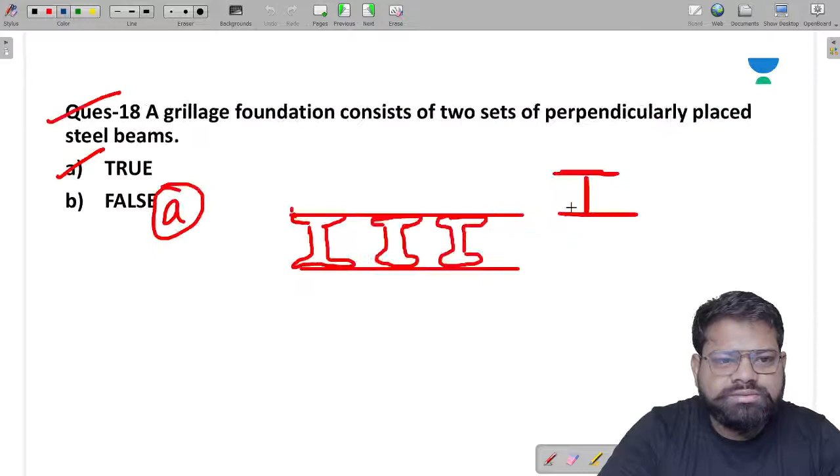So in the last class what did we do, we did many one liners up to question number 25, I think. Up to question number 25 we have done the one liners. So let's start the one liners from question number 26.

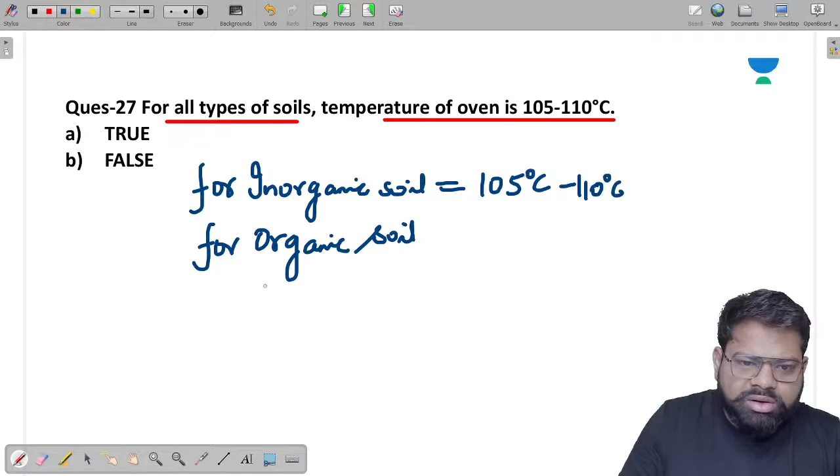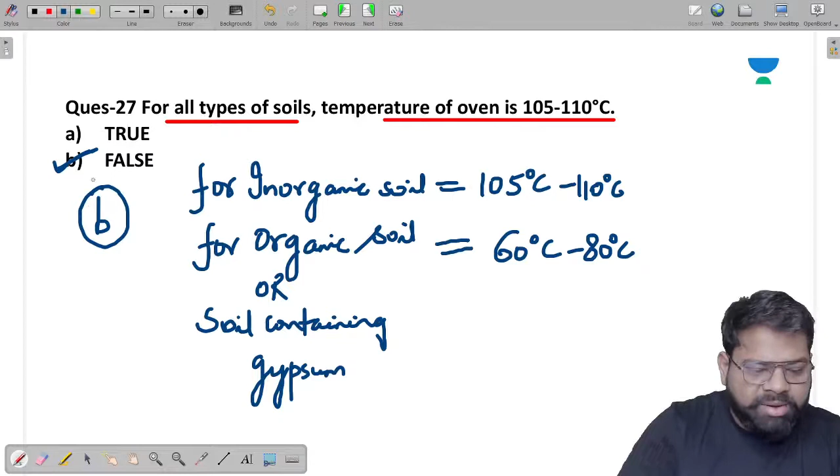But if I talk about the organic soils, or soil containing gypsum content, then the temperature lies between 60 degrees Celsius to 80 degrees. What he is trying to say, for all types of soil, the temperature lies between 105 to 110 degrees Celsius - this statement is absolutely false. The correct answer of this question would also be B. Moving forward, question number 28.

Question number 28. Just read it. As the coarser particles are mixed in the soil, the value of OMC increases, but the maximum dry density decreases.

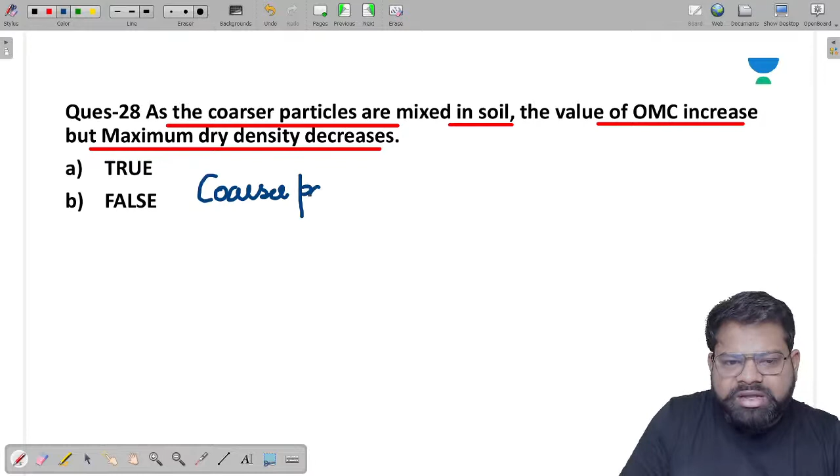When we add some coarser particles in any soil, the specific surface area of that soil will decrease. If the specific surface area decreases, then the soil needs less water to lubricate its particles. And if less water is required, then a higher gamma D will be obtained. So when you add coarser particles to the soil, the specific surface area decreases, OMC will automatically decrease, and if OMC decreases, then the maximum dry density gamma D maximum will increase.

The correct answer would be: he is saying that the OMC will increase but the maximum dry density will decrease. But actually, when we add coarser particles to the soil, the OMC decreases and the maximum dry density increases. So this statement, question number 28, is also false. This statement is absolutely false.

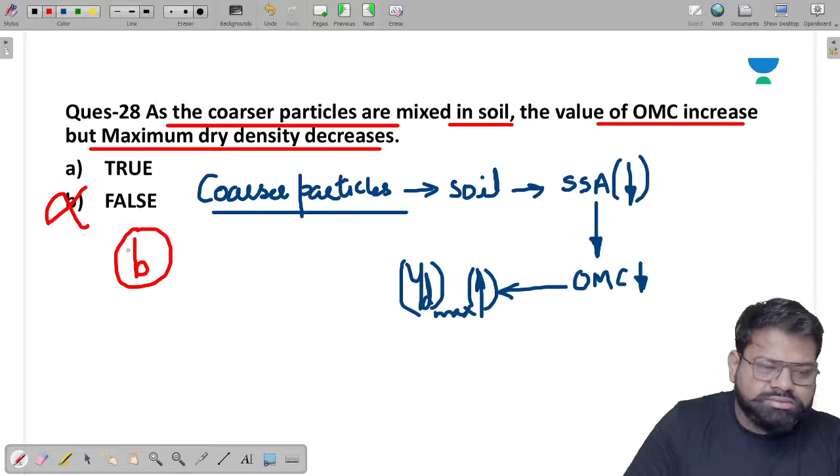Moving forward, this is question number 29. Tell me the answer of question number 29. Silty gravel has a higher maximum dry density as compared to silty sand at the same compaction energy.

This is a beautiful question. Silty gravel has a higher maximum dry density as compared to silty sand. So there are two types of soil: one is silty gravel, which is GM, and another is silty sand, which is SM.

If you apply the same compaction energy to both the soils, my dear students, then which soil has a higher specific surface area? The specific surface area of SM is greater than the specific surface area of GM.

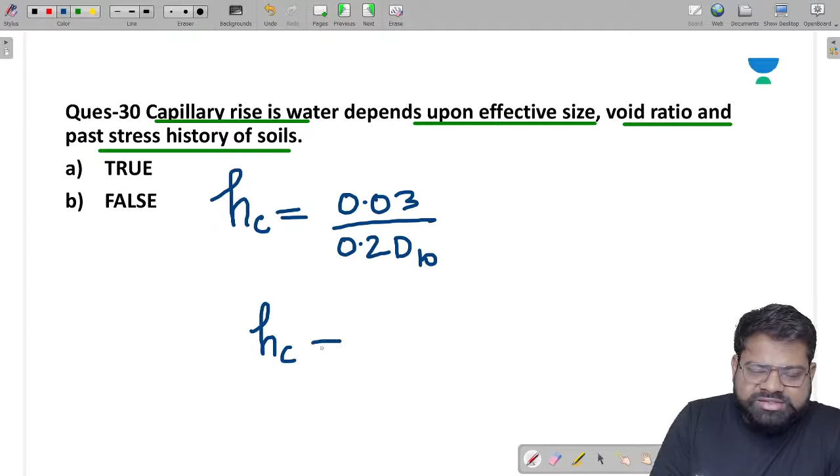As we know, capillary rise is a complex function of the soil voids which are interconnected in the soil. HC can be determined by 0.2, or 0.03 divided by 0.2 times D10, or it can also be determined by HC equal to C upon E into D10.

So here you are saying that capillary rise depends upon the void ratio, capillary rise depends upon the effective size, and also capillary rise depends upon the past history. So this statement is absolutely true. The right answer of question number 30 would be A. Very good, the right answer of question number 30 would be A.

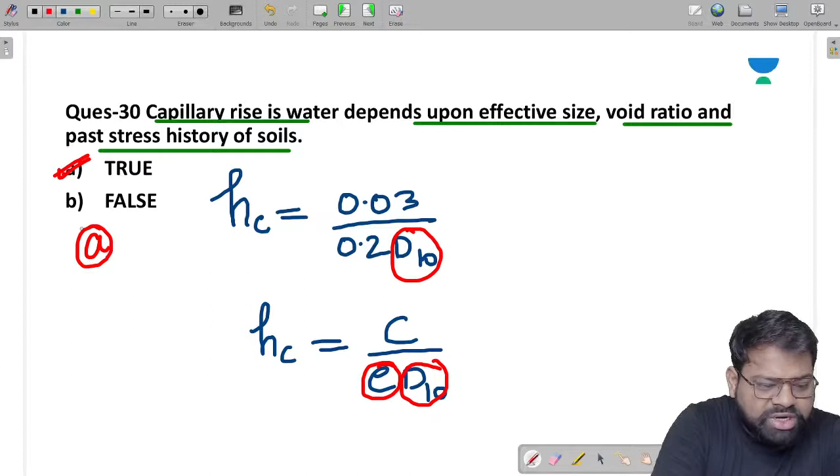Moving forward, tell me the answer of question number 31. Tell me the answer of question number 31.

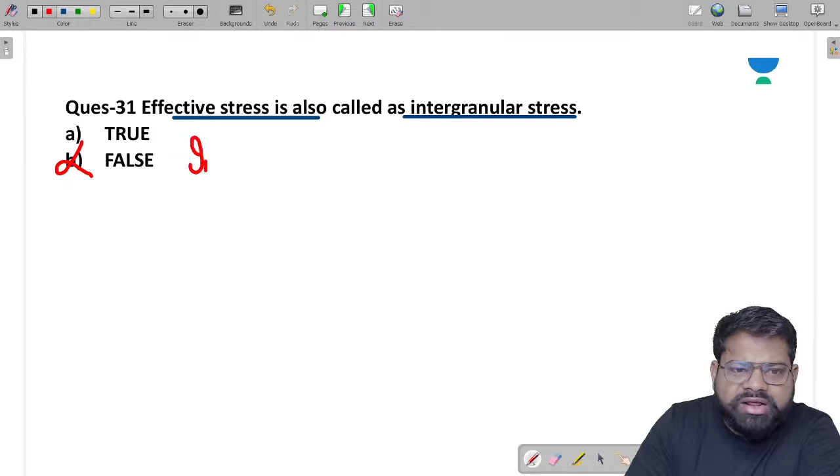If I talk about the intergranular stress, what is intergranular stress? It is the sum of forces transferred through grain to grain contact in the normal direction, divided by grain contact area. This is called intergranular stress.

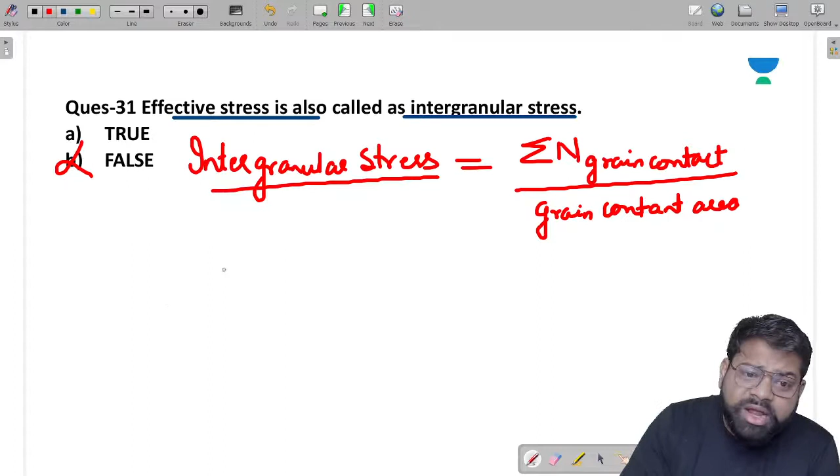But according to Terzaghi, effective stress was defined as the summation of normal forces transferred through grain contact, divided by total area.

So if you see the first statement, it has a certain physical meaning: intergranular stress equals the summation of forces transferred through grain contact, divided by grain contact area.

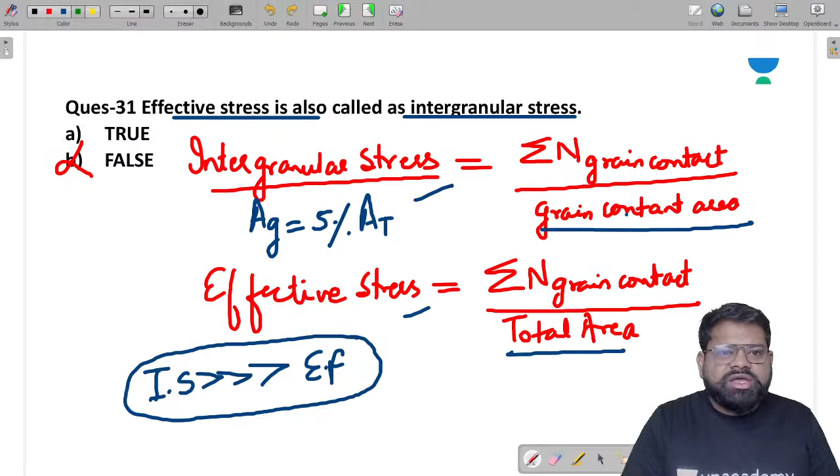Shashi is absolutely right. This statement was true according to Whiteman, but when Terzaghi came into the field for effective stress, he defined it in a better way. That's why this assumption of transferring stresses through grain to grain contact, called effective stress, was discarded. Nice explanation by Shashi, very good.

Moving forward to question number 32: best soil for homogeneous rolled embankment. What do you mean by homogeneous? It means the soil is homogeneous throughout its cross section and length. What do you mean by rolled? It means the dam is constructed by rolling, by doing compaction. By rolling or compacting a homogeneous soil, we construct what is called a homogeneous rolled earthen dam.

So he is asking what is the best soil for the homogeneous rolled dam or embankment. Just think, what is the purpose of a dam?

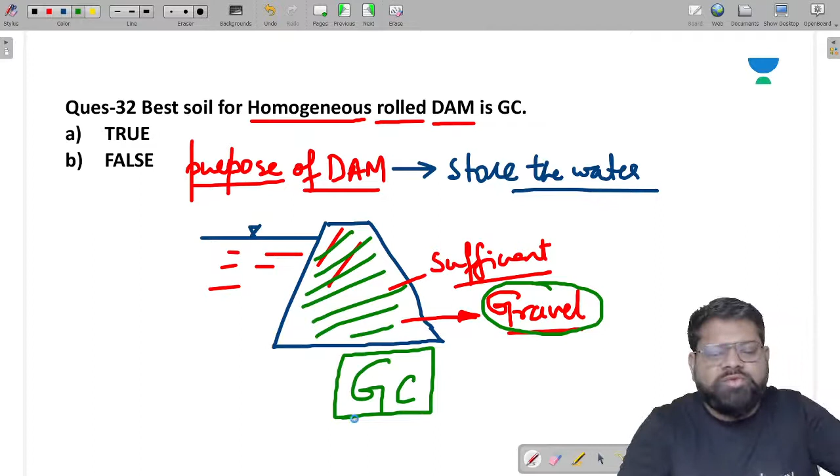Moving forward to question number 33. Tell me the answer of question number 33.

What is it all about? When the actual hydraulic gradient is equal to critical hydraulic gradient, then the effective stress becomes zero. When the actual hydraulic gradient becomes equal to critical hydraulic gradient, then the effective stress in clay becomes equal to zero. Whether this statement is true or false, Madhu Maurya is saying 33's answer is B.

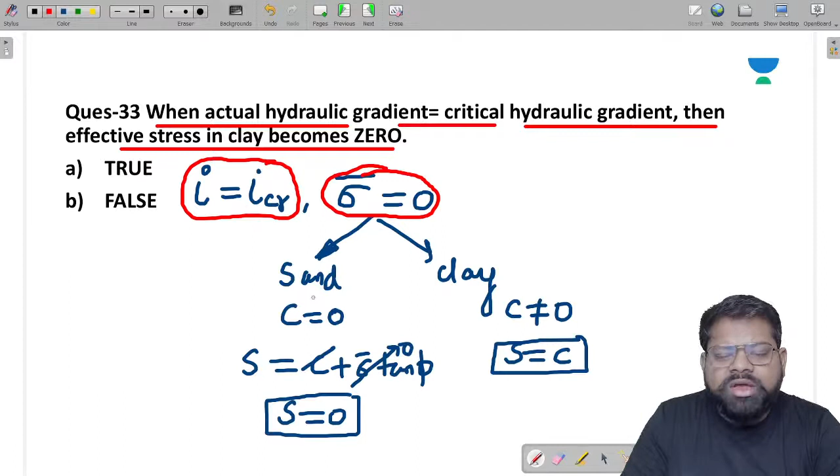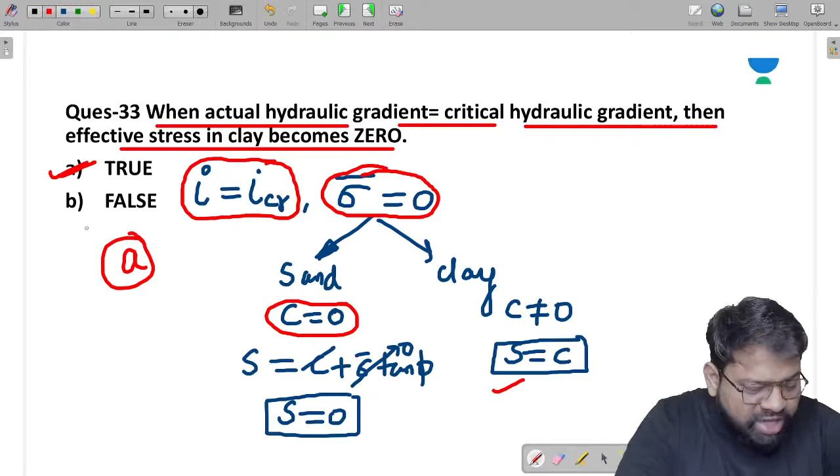This statement is absolutely true. Both the soils will be subjected to zero effective stress. I hope your concept is cleared now. Moving forward, yes Shashi, your answer is right, but Madhu Maurya, your answer is wrong. No issues, moving forward to question number 34.

Tell me the answer of question number 34.

So what he is trying to say is that the flow net is the graphical solution of the Laplace equation, which indicates how much hydraulic energy will be lost when the water flows through a resisting medium. When water flows through the resisting medium, how much energy will be lost? He is trying to ask. So the right answer of this question would be 34's answer A.

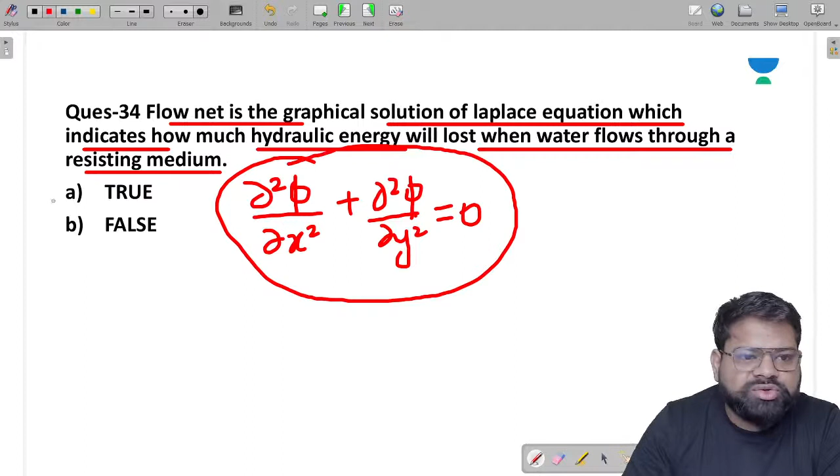Moving forward to the question number 35. Tell me the answer of question number 35.

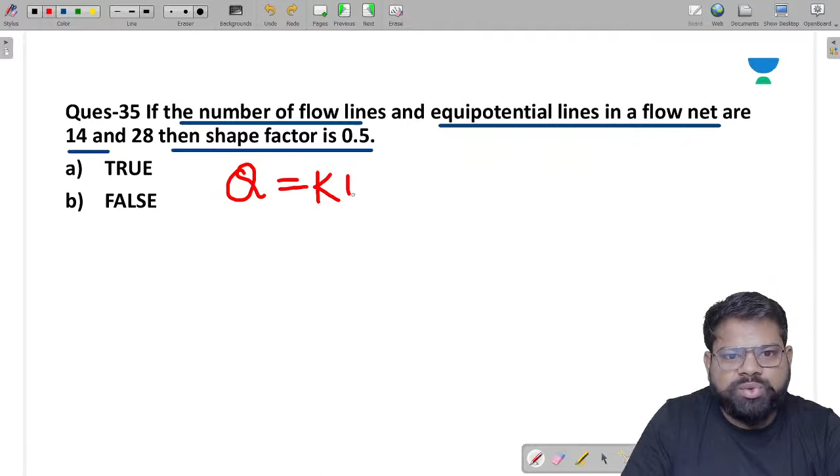So Madhu is 35 का B. देखते हैं जरा बेटा, शेप फैक्टर क्या होता है. अगर आप बेटा फ्लो नेट की मदद से डिस्चार्ज निकालते हैं तो Q होता है, Q is equal to KH multiplied by NF upon ND. So this NF upon ND is called as shape factor.

So कह रहा है if the number of flow lines and number NF होता है number of flow channels, ND होता है number of equipotential drop. और नंबर ऑफ फ्लो चैनल्स किसके बराबर होते हैं, नंबर ऑफ फ्लो लाइंस -1, एंड नंबर ऑफ इक्विपोटेंशियल ड्रॉप इज इक्वल टू नंबर ऑफ इक्विपोटेंशियल लाइन -1। सो बेटा यहां से अगर आप शेप फैक्टर निकालेंगे SF, तो नंबर ऑफ फ्लो लाइंस आपको दे रखी हैं 14, तो 14 - 1 नंबर ऑफ फ्लो चैनल्स डिवाइडेड बाई आपको बेटा इक्विपोटेंशियल लाइन दे रखी है 28।

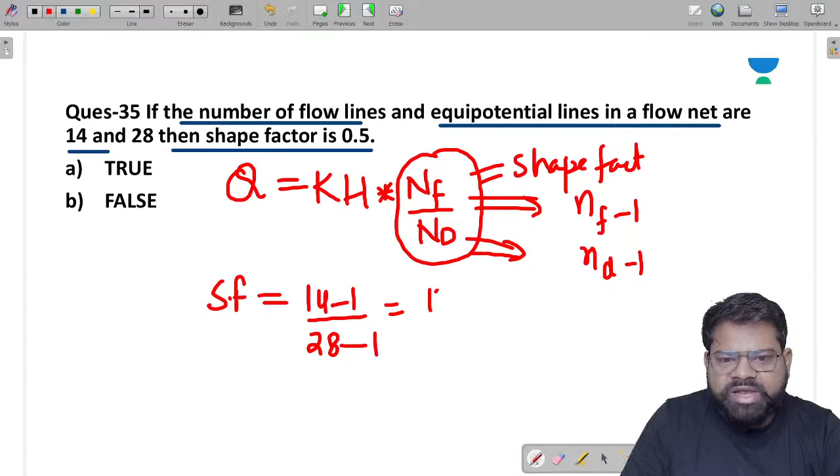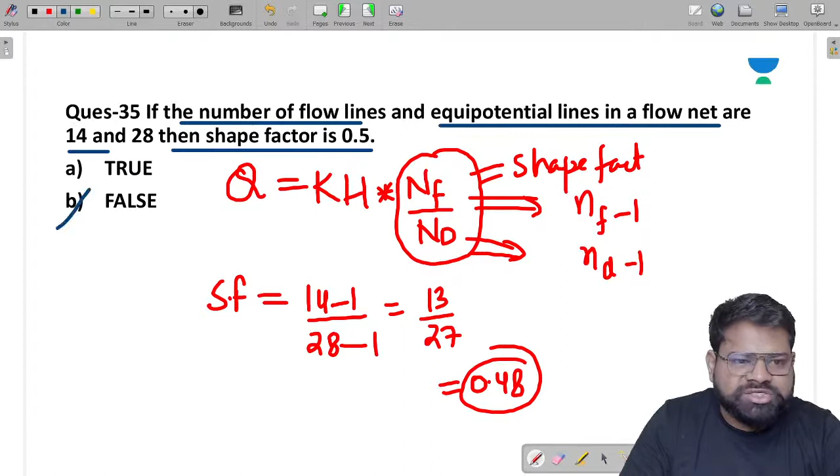तो ये हो जाएगा 28 माइनस 1, तो ये वैल्यू आ जाएगी 13 डिवाइडेड बाई 27। कितनी वैल्यू आ रही है, ये वैल्यू आ रही है 0.48, लेकिन साहब बोल रहे हैं 0.5, तो इसका मतलब ये ऑप्शन फॉल्स हो जाएगा। Very good explanation, very good answer by Shashi and Madhu. Okay, great.

Moving forward to the question number 36. Question number 36 का आंसर बताइए। Tell me the answer of question number 36.

When the water flows from a higher permeability region to the lower permeability region through a non-homogeneous section, then the flow lines deflect away from the normal drawn on a non-homogeneous section.

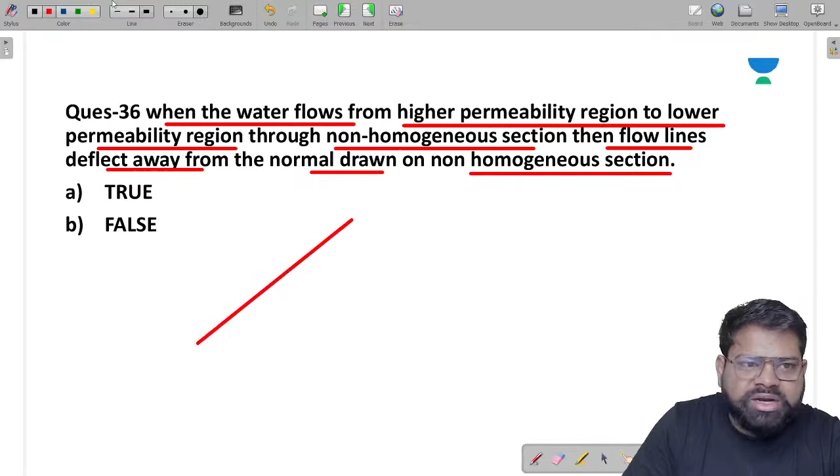When the water flows from high permeability region, suppose this is the region, the high permeability region. What does it mean by high permeability region? It means suppose the permeability here is K1, K2, so here K1 is greater than K2. If K1 is greater than K2, then the water will flow easily, then the head loss will be less. When the head loss is less, it means this medium is the rarer medium. In this case, this medium will be denser as compared to this medium.

Now what happens when water flows from higher permeability to lower permeability? This is basically the flow line, and this is basically the normal drawn. So what happens when light flows from rarer medium to denser medium, it will bend towards the normal. Similarly, when the flow line or water flows from rarer medium to denser medium, it will bend towards the normal.

And what he is saying is that it will deflect away from the normal, so this statement is false. The correct answer would be B.

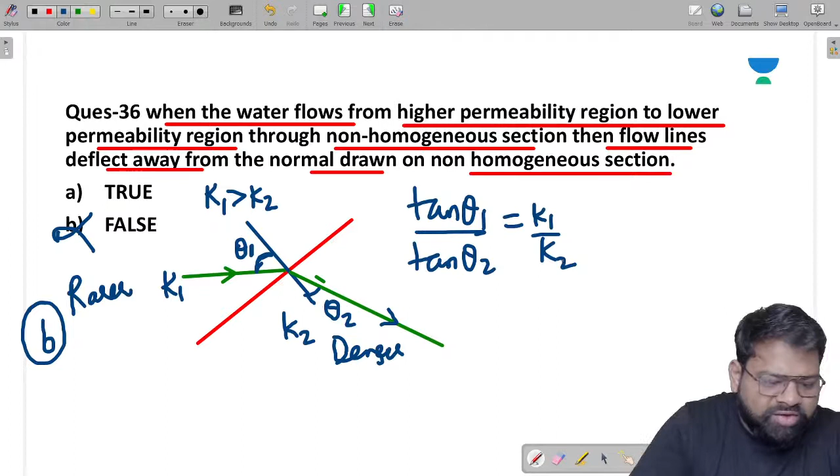And if you want to know the formula, if θ1 is the angle made by the normal of the flow line, this is called θ2, then the formula for law of permeability is tan θ1 upon tan θ2 equals K1 divided by K2. So the answer of this question would be B.

Moving forward to the question number 37. Tell me the answer of question number 37.

The upstream face of an earthen dam is a flow line - tell me whether this statement is true or false. This is supposed for an earthen dam, for example an earthen dam. When we construct the earthen dam, we construct it generally...

...when the foundation is weak, it does not have a tendency to support a gravity dam. So when you make the earthen dam, you store water behind it. Because of the porous nature of the soil, the water will start moving through the soil, and in order to catch that water, we make a filter called the drainage filter at the base.

So water will flow like this - suppose this is how the water flows. So these are basically the flow lines, and these lines which are perpendicular to the flow lines are called equipotential lines.

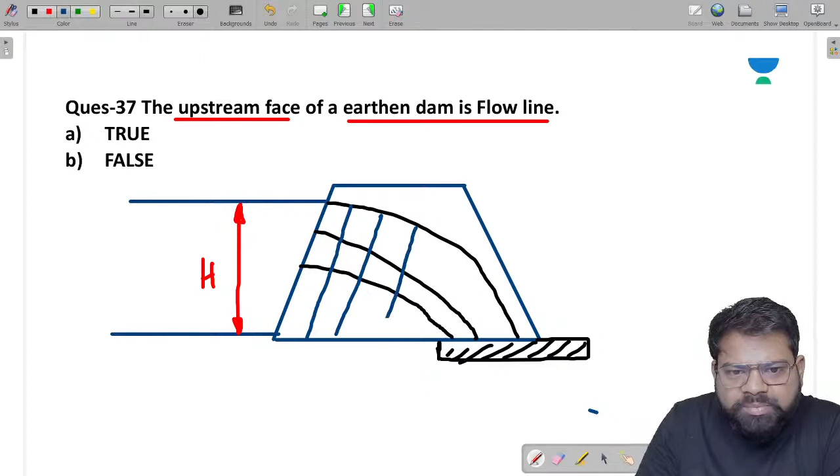So what is the first equipotential line? This is the first equipotential line. And if I talk about the flow line, this will be the first flow line. So the shape of this top flow line...

...is parabolic. The pressure on this top flow line is atmospheric. That's why the top flow line of the earthen dam is also called the phreatic surface.

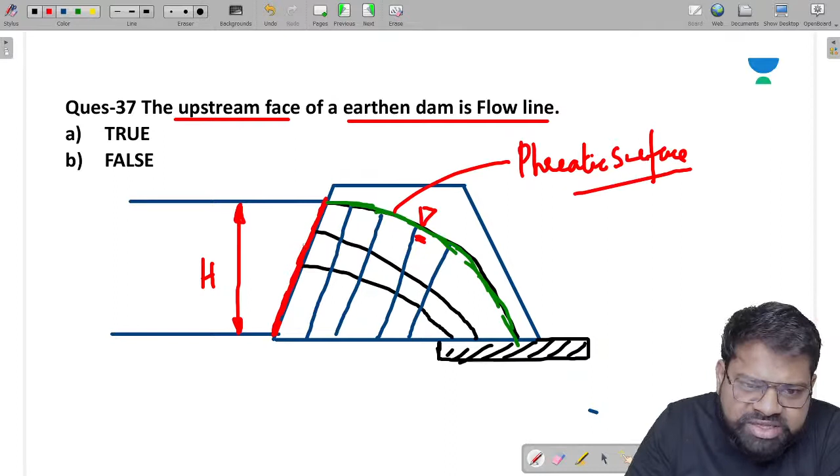But in the question he is trying to ask, what is the upstream face? So this is basically the upstream face. This upstream face is not the flow line - it is basically the equipotential line. So this statement is absolutely false.

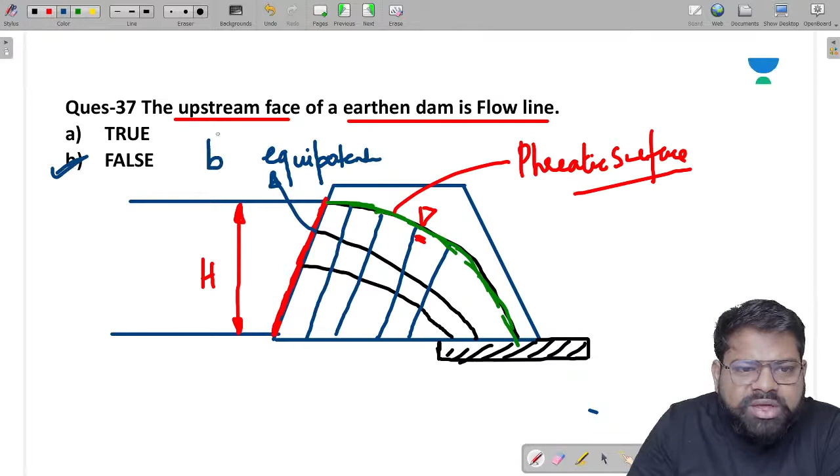Okay, great Shashi, great. So the right answer of this question would be B. The right answer of question number 37 will be B. Okay, moving forward to question number 38.

Tell me the answer of this question. The value of R upon Z at which stresses obtained from the Boussinesq theory and the Westergaard theory are equal is 1.5.

So if I talk about the Boussinesq theory, according to it sigma b is equal to kb into q by z square, that is kb into q by z square. And if I talk about the stresses by Westergaard theory, then it is equal to kw multiplied by q by z square. If I talk about the formula for kb...

...then the formula for kb is equal to 3 upon 2 pi into 1 plus (r upon z) whole square, whole raised to the power 5 upon 2. But if I talk about kw, the formula for kw is equal to 1 upon pi into 1 plus 2 times (r upon z) whole square, whole raised to the power 3 upon 2.

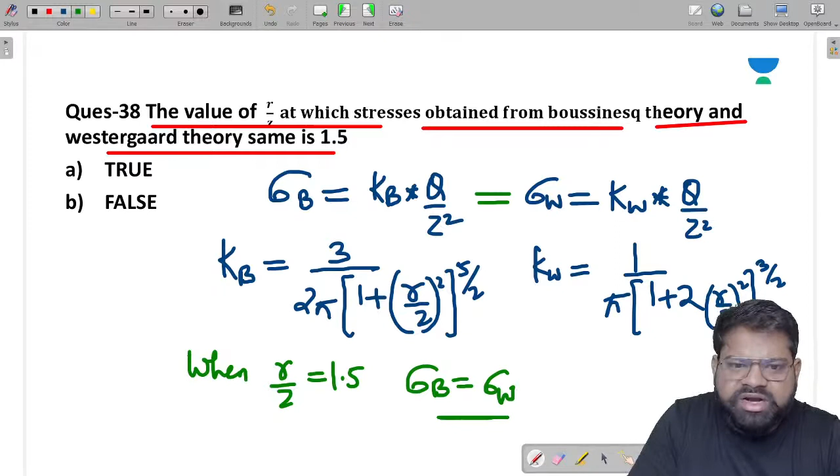So the question asks what is the value of r upon z when both the stresses are equal. When you equate both the stresses and do the calculation, you find that when r upon z is approximately equal to 1.5, the stress by the Boussinesq theory equals the stress by the Westergaard theory. So this statement is absolutely true. The answer of question number 38 would be A.

Very good, Madhu. Very good, Shashi. Moving forward to question number 39. Tell me the answer of question number 39.

Yeah, exactly it is 1.52, but approximately most books write it as 1.50. So we can take it - yes, base parabola, absolutely right. So 1.5 is usually taken, and in your exam if he is referring to 1.5, you can take it.

Question is incomplete - consolidation through vertical sand drains is the case of 1D consolidation. The question is complete, my dear student. This question is complete, there is nothing remaining in the question. The question is absolutely complete.

Sorry, my dear students. Nowadays my health is not well, I don't know, weather is changing. The corona is also growing, maybe because I go outside. From a few days I'm not feeling well. So Shashi is saying true.

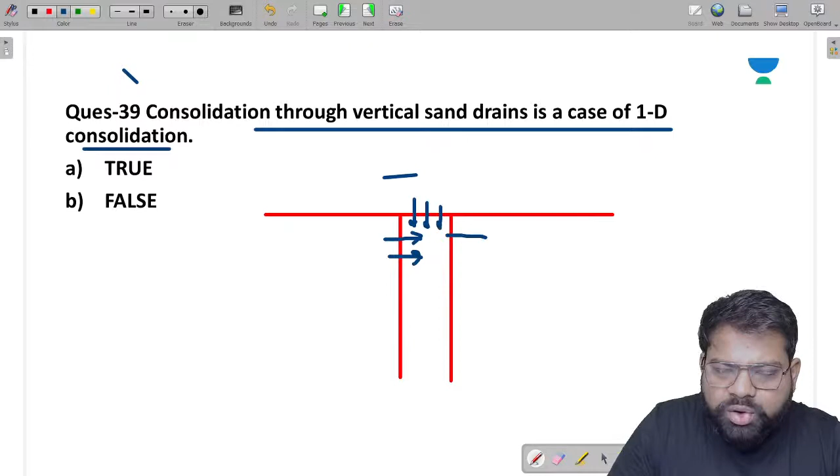The question is whether consolidation through vertical sand drains is a case of 1D consolidation. This is absolutely false, because when you construct sand drains, the flow of water through them is lateral also, and vertical also. So the consolidation through vertical sand drains is an example of radial flow and vertical flow. So it is basically a two-dimensional flow. This statement is false. It is the case of 2D consolidation.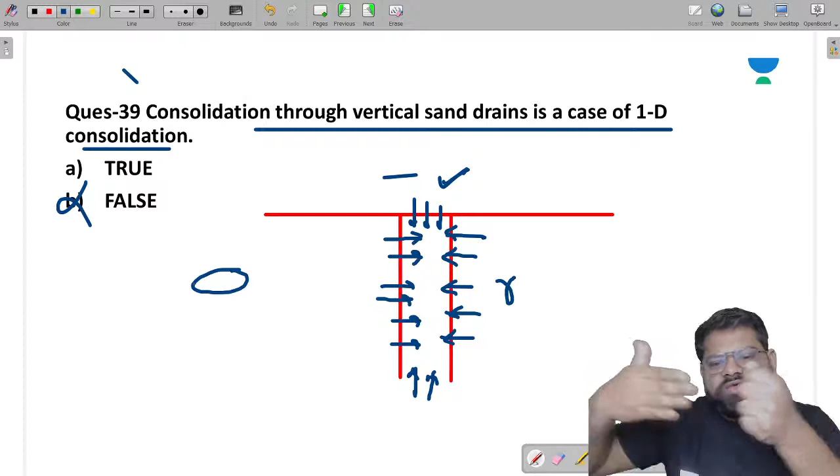So is vertical sand drains a case of 1D consolidation? No, it is actually a case of 3D consolidation. If you see in 3D, with vertical sand drains, water will go into the sand from outside also - from the X direction, from the Y direction, and water will move from the Z direction also. So it is not the case of 2D. It is a case of 3D consolidation. Consolidation through vertical sand drains is 3D, not 1D or 2D. This statement is absolutely false. So the answer of this question would be B.

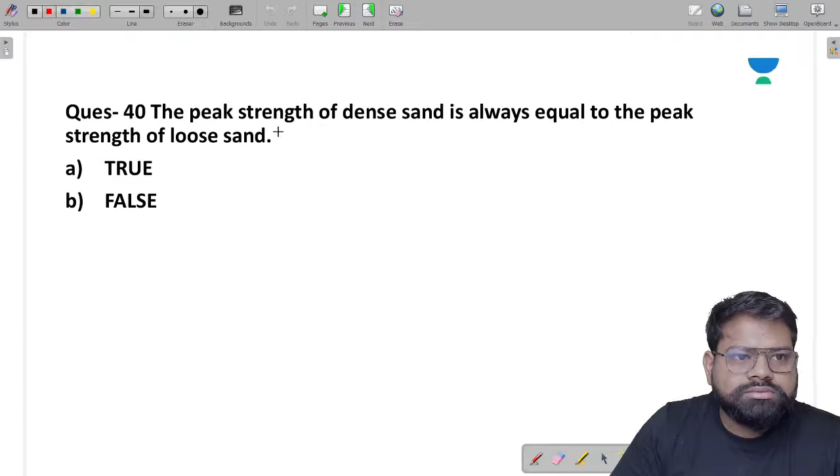The peak strength of dense sand is always equal to the peak strength of loose sand.

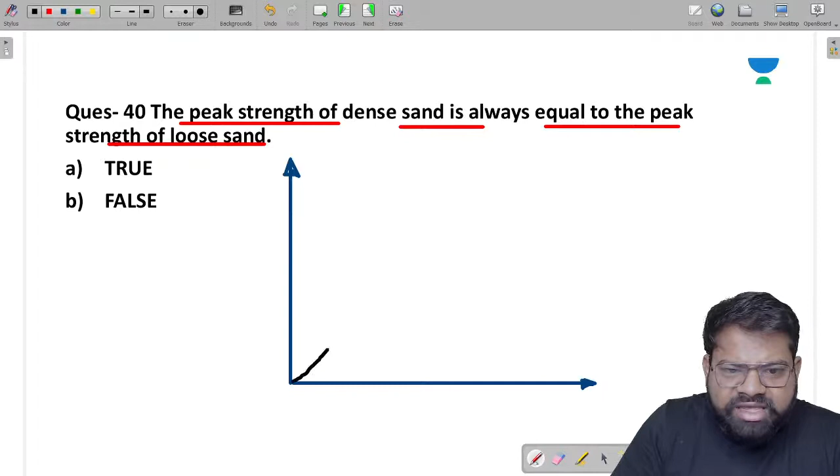This is basically the curve. This curve is of dense sand and this curve is of loose sand. This is called the peak strength of dense sand, and this is the peak strength as well as ultimate strength of loose sand. This lower point indicates the ultimate strength of dense sand. So the peak strength of dense sand is always equal to the peak strength of loose sand - it will never be possible that peak strength of dense sand becomes equal to peak strength of loose sand. This statement is false.

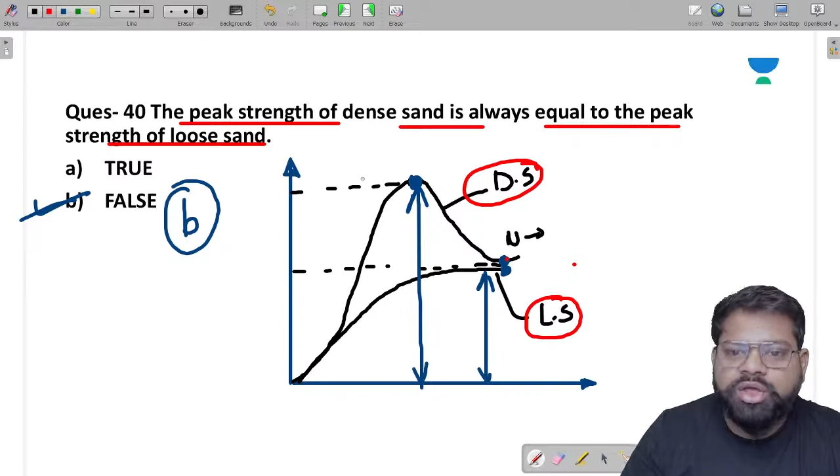This statement is absolutely false. The answer of question number 40 will be B.

Moving forward to question number 42. Pole or the origin of planes is a unique point on the Mohr circle. Tell me whether this statement is true or false.

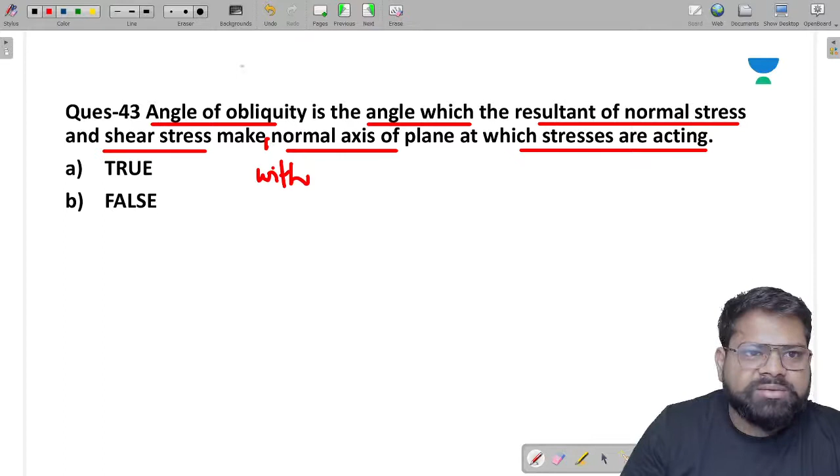So what he is trying to say is, suppose this is the plane. Angle of obliquity is the angle related to the normal stress acting on any plane. Suppose this is the shear stress and this is the normal stress. The angle of obliquity is the angle which the resultant of these, suppose this is the resultant, makes with the normal axis of the plane. So this is basically the angle of obliquity, and this statement is true.

Okay, yeah, the answer of 43 is true. This statement is absolutely true.

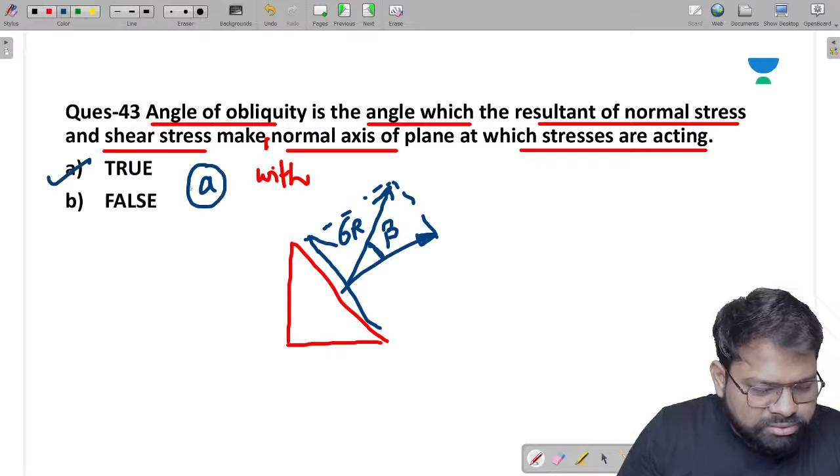Shashi is asking, can you explain question number 42 by diagram? Yes, I can explain this by the diagram. What do you mean by the poles or the origin of planes? So the answer of question number 43 is absolutely true. Shashi is saying, explain question number 42 with the diagram. Let me check, let me tell you what do you mean by the pole or the origin of planes.

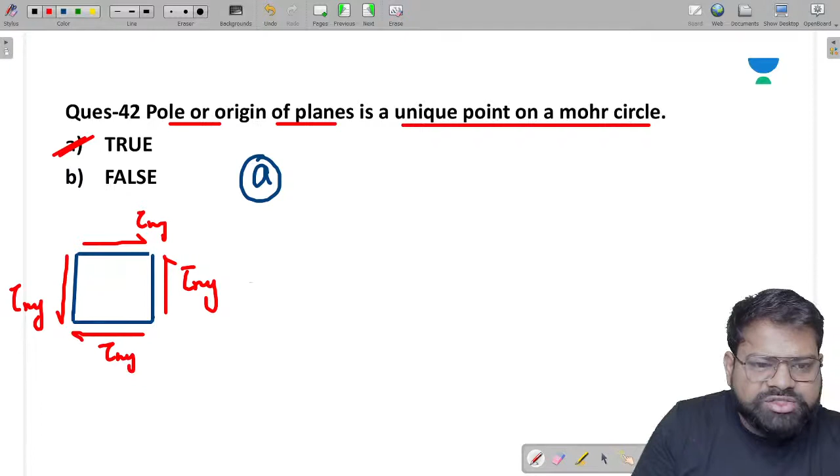Just see, suppose for example this is an element subjected to certain forces. It is subjected to shear stresses tau xy on all sides, and it is also subjected to sigma x and sigma y.

So how do we determine the pole? The pole is a unique point. Pole is the point through which if I pass a line at an angle of theta, then this line will intersect the Mohr circle at some point. The point at which the line, drawn at an inclination of theta, cuts the Mohr circle gives some stresses, sigma comma tau.

So those stresses are given by the line cut at inclination theta, drawn passing through the pole. The inclination of the line passing through the pole is suppose theta; it will cut the Mohr circle at a point sigma comma tau. The inclination of these stresses on the actual plane on which they act will also be theta. So this sigma comma tau will be acting on this plane.

So what I'm trying to say is that the pole is basically that unique point through which if I pass a line, then the slope of that line will be the same as the slope of the plane on which the stresses sigma comma tau act, which are obtained by the intersection of the line with the Mohr circle. This is called the pole.

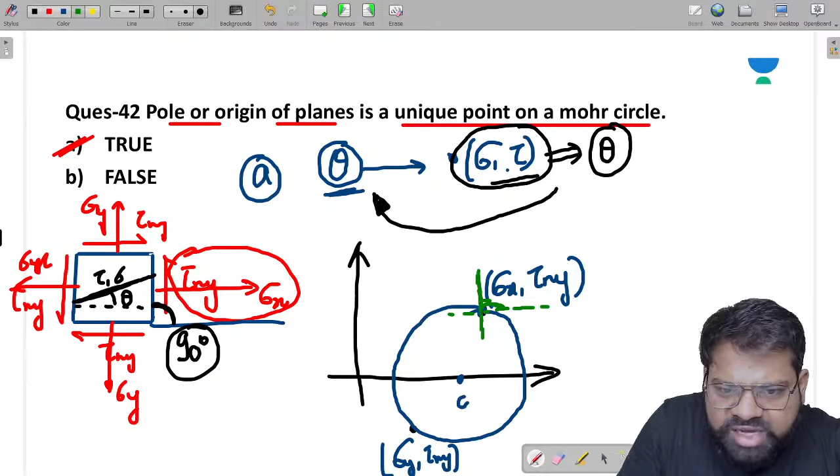Suppose now we want to find the pole. We know that sigma x and tau xy are acting on a plane which is at an angle of 90 degree with the horizontal. So what I will do is draw a horizontal axis, and then draw a line at an angle of 90 degree. It will cut at a certain point, and this point is called the pole.

If you don't want to learn from this concept, just see these stresses. You know about sigma x, sigma y and tau xy. This sigma y and tau xy are acting on a plane which is at an angle of 0 degree with horizontal. So you go to this point, draw a horizontal line at an angle of 0 degree, and you will see it intersects at this point. This point is basically the pole. The pole is the unique point through which you can determine the stresses.

Now if you want to find the stresses on the plane which is at an angle of 60 degree, from the pole you draw a line at an angle of 60 degree. When you draw this line, it will intersect at some point, and these are the stresses on the plane of 60 degree. So the pole is the unique point, and this method of determining the pole is called the pole method. By using the concept of pole, we can determine the shear and normal stresses on all the planes. I hope you understand.

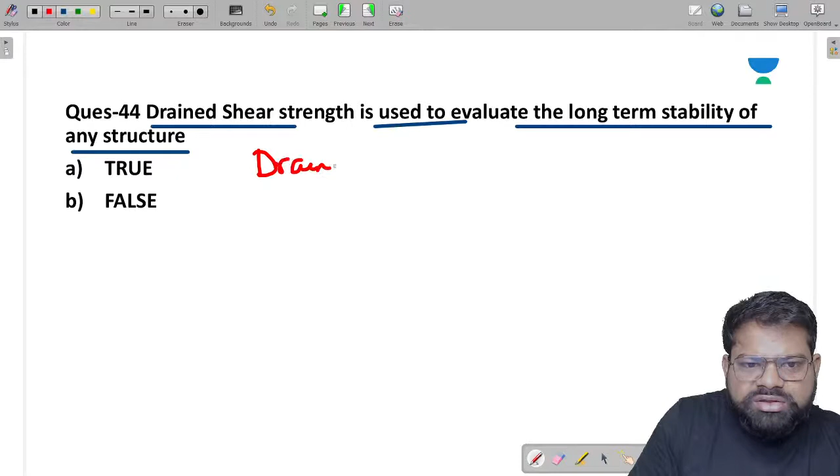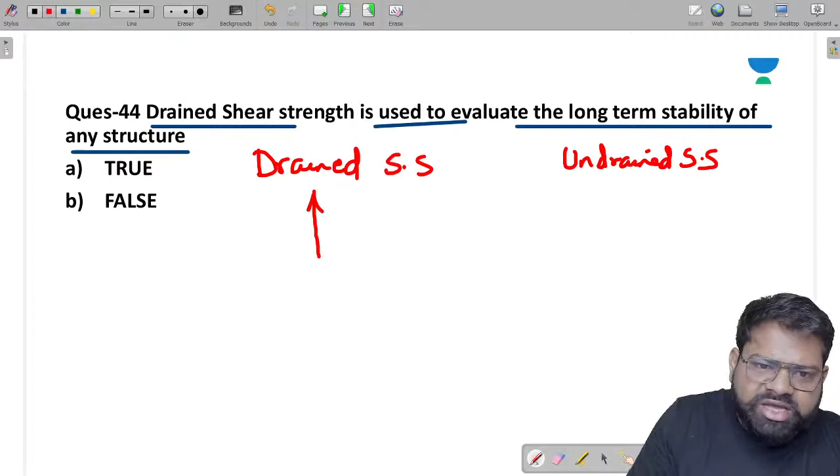There are two types of strength: drained shear strength and undrained shear strength. The undrained shear strength in clay soils generally happens in the short term. When we apply the load, an excess pore pressure develops, and in the long term, that excess pore water pressure gets dissipated. So the drained condition sets up in the long term, and the undrained condition sets up in the short term. That's why drained shear strength is used to evaluate the long-term stability of any structure, and undrained shear strength is used to evaluate the short-term stability. So the right answer of this question would be true.

The right answer of this question would be true.

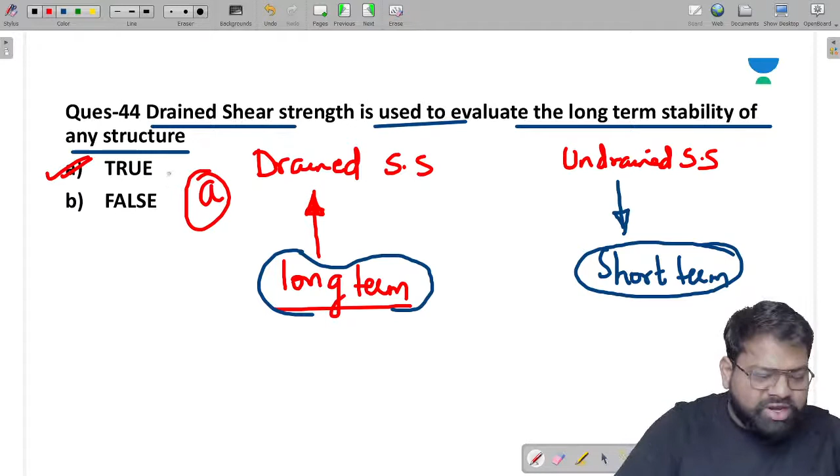Very good, Madhu. Very good, Vikas. Okay, moving forward to question number 45. Tell me the answer of question number 45.

Tell me the answer of question number 45. In normally consolidated clay, it behaves like a slurry at zero effective stress. In normally consolidated clay or normally...

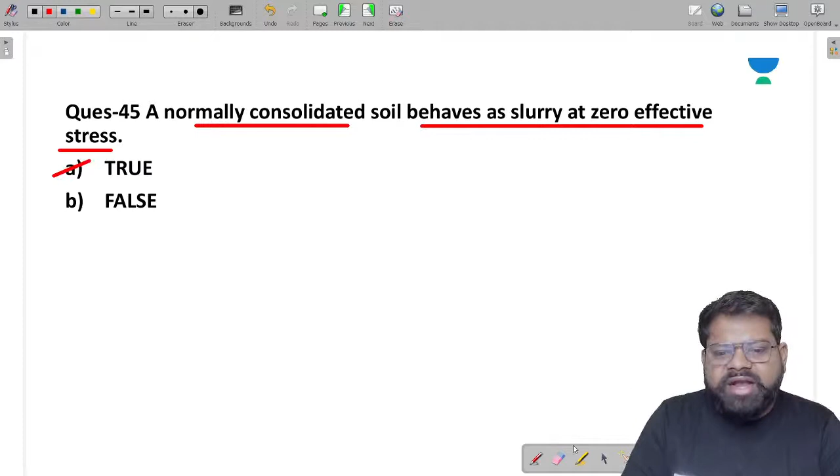Moving forward to question number 46. Okay, this is very nice. Moving forward to question number 46. Tell me the answer of question number 46.

In a vane shear test, the shear stress distribution at the time of failure is parabolic along the diameter and linear along the length. So you need to answer this question. So these are basically the vanes.

Okay, so I will try to tell you what is the shear stress distribution. Meanwhile, you can answer it also. So this is the axis of the shaft which we insert. It is uniform along the length and triangular on the top and bottom plates.

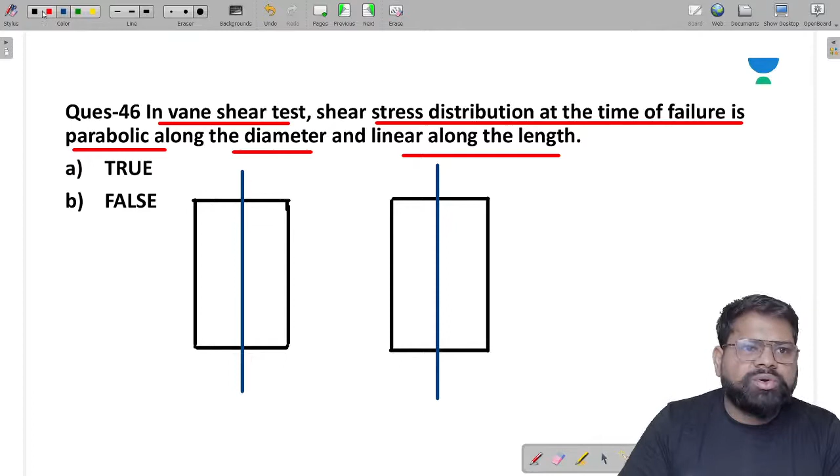Just listen, my dear student. If I talk about the actual shear stress distribution, what happens? The actual shear stress distribution would be like this. It is basically linear or constant along the edges, along the length, it is basically this. But...

If I talk about the diameter, then it is parabolic. This is all about the actual shear stress distribution in the vane shear test.

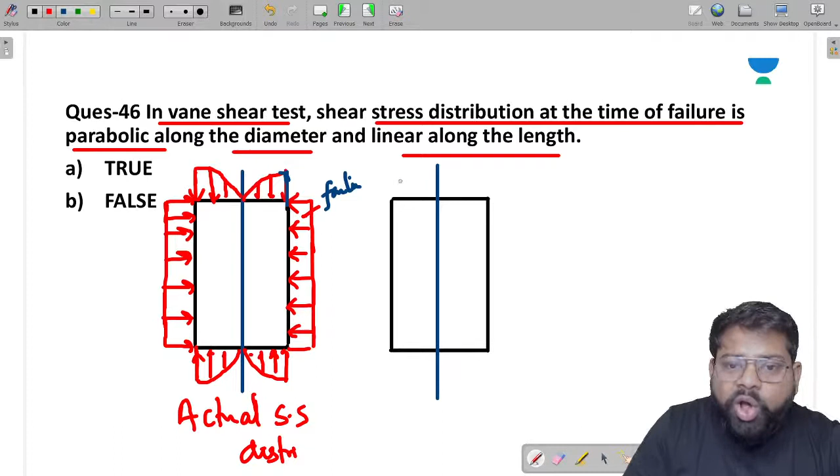So what happens as you apply the torque, initially the outermost fiber will fail. The shear stress in this outermost fiber reaches the shear strength of the soil first, but as you apply more torque, the inside layer particles also increase in shear stress, and the inside fiber also reaches the maximum stress. So at the time of failure, all the fibers are subjected to a stress called the failure stress, or the shear strength of the soil.

That's why at the verge of failure, all the fibers get subjected to failure. So at the time of failure, you will see linear distribution along the length, and also linear or uniform distribution along the diameter. This is when all the fibers reach their maximum limit, then the soil is at the verge of failure. And this is the case when the soil is at failure.

So basically this statement is absolutely wrong, because the actual distribution will be like this, and we assume in soil mechanics, as was said, that it is linear along the length and triangular along the diameter. In the case of strength of materials, we assume this parabolic curve to be triangular.

Because we have studied tau by r is equal to T by J, so tau is directly proportional to radius, we assume it to be linear. We assume it to be linear only when the material is homogeneous, isotropic and elastic. But since soil is not homogeneous and not elastic, the actual shear stress distribution comes out to be parabolic around the diameter and linear along the length.

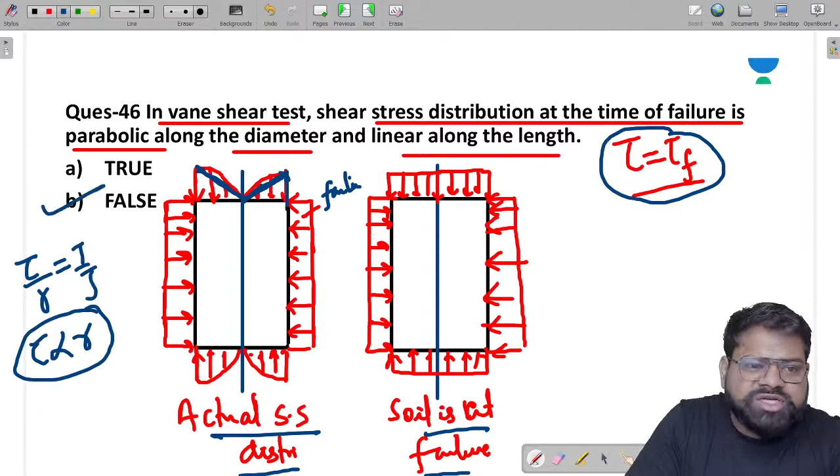And that is when the soil has not failed. But when the soil is at the verge of failure, all the fibers get subjected to the stress equal to tau f, then a linear distribution is obtained both along the diameter and along the length. So this statement would be false. That is option number B.

I hope you have understood some new things. Moving forward to the next question, this is question number 47. Tell me the answer of question number 47.

No. In the derivation, we assume the linear, we assume a linear element at a distance of r.

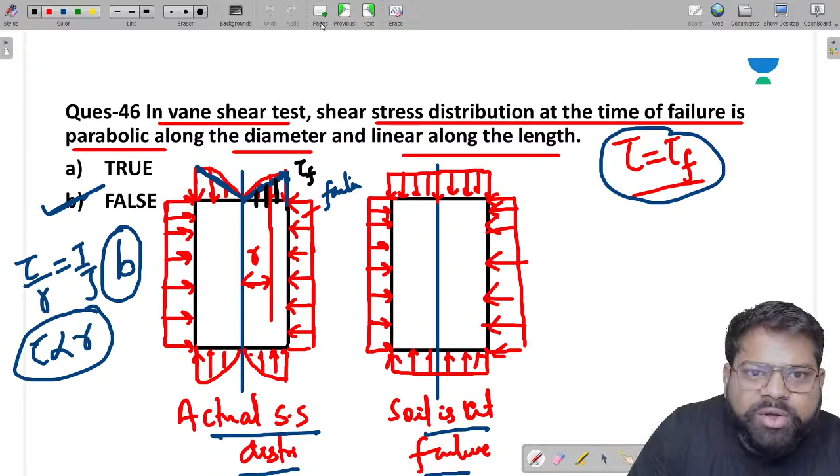If you assume it linear, then the stresses here are different, here are different, here are different. But while doing derivation, suppose this is the circular part, and as the radius is changing, at a distance r, you assume a dr element. So if I talk about what are the stresses at this point, if I talk about the torque, the torque is equal to force into perpendicular distance.

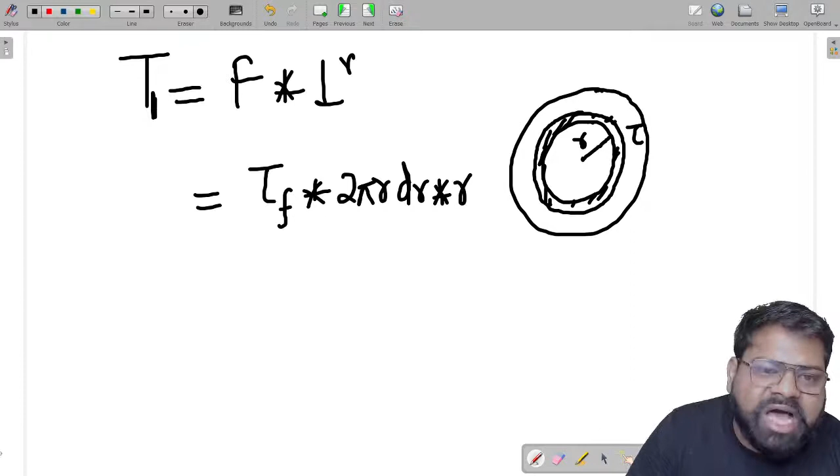So what is force? Force is equal to shear stress, and you assume the shear stress is not to be the shear stress at this point, but rather tau f, multiplied by 2 pi r into dr and multiplied by the distance r. So at a radial distance r, when you assume an element dr, we assume the stress to be tau f. If you assume it to be linear, then it means at distance r you have to assume the shear stress to be tau r. But actually we have assumed these stresses to be linear, because at the verge of failure, all the fibers will be subjected to the same shear stress, that is called tau f.

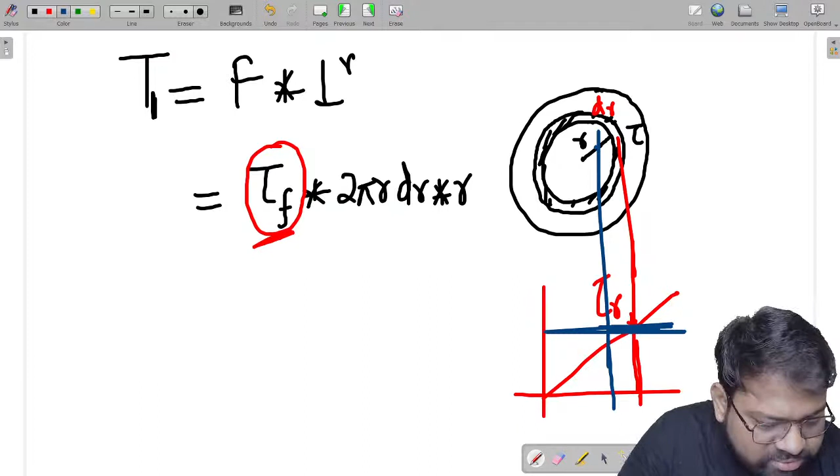We will assume the ring. If you take a radial distance, the shear stress will be tau f only, because if you don't take tau f, how would you determine it? At every radial distance you get a different shear stress, so you would need the shear stress of that specific point. Did you do it like this? No, you just assume the shear stress to be linear, and it will be linear because we do the analysis when the soil is at the verge of failure. I hope, Shashi, you have understood this concept.

Whether this concept is clear or not. While doing derivation, we assume that the distribution is linear. We don't assume the distribution is triangular.

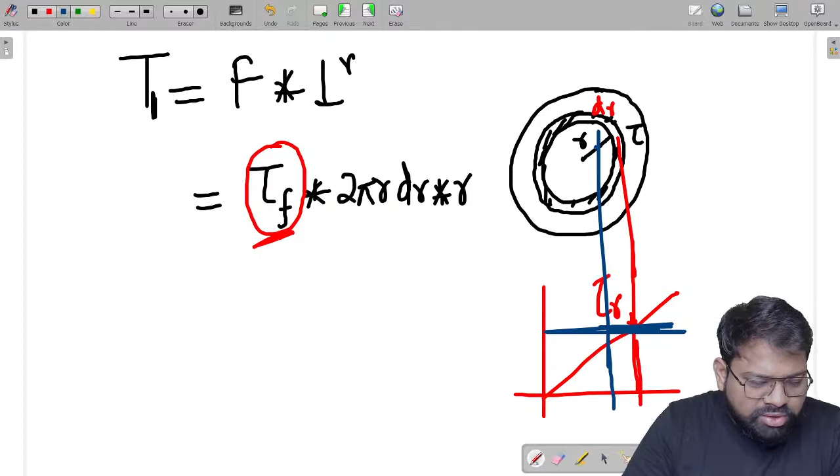Just tell me first, okay, no issues. Thank you so much. Okay, this is question number 47. Just tell me the question number 47.

Question number 47. When the dense sand is tested in undrained and drained conditions, the shear strength in the undrained condition would be greater than the shear strength in the drained condition. Tell me whether the statement is true or false. Tell me the answer of question number 47.

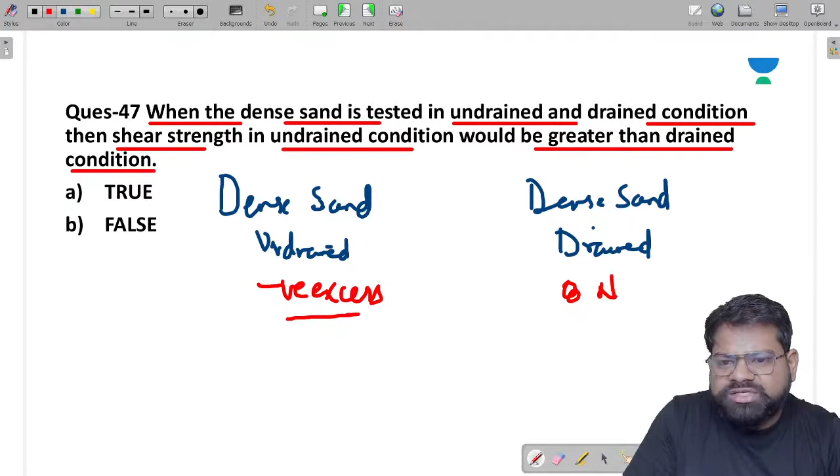So in this case, when the soil is tested in the undrained condition, the effective stress comes out to be more. So the dense sand will give more shear strength in the undrained condition as compared to the drained condition because of negative excess pore water pressure in the undrained condition. So this statement is true. The answer of question number 47 is A. No, no.

In the drained condition, the shear strength will be more as compared to the loose sand. In case of loose sand, undrained shear strength will be less than the drained shear strength. But in case of dense sand, undrained shear strength would be greater than the drained shear strength. Let me explain with loose sands. Suppose there are two loose sands - one subjected to undrained condition, and the other subjected to drained condition.

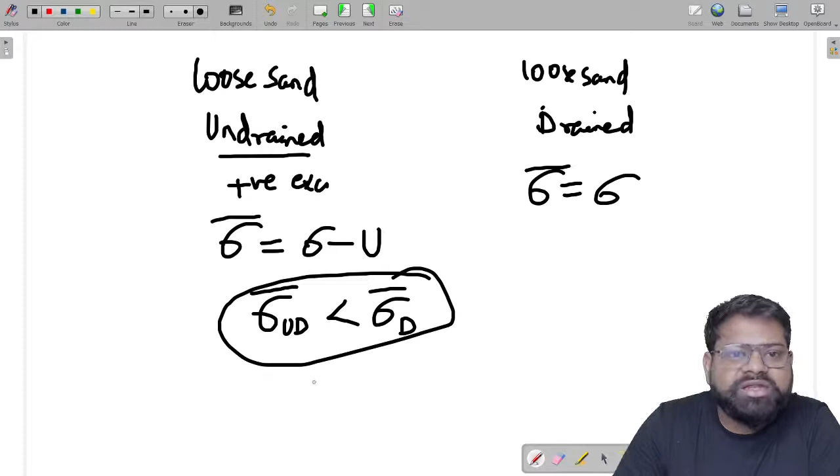In case of loose sand, a positive pore water pressure will develop, and the effective stress decreases because of this positive value. But in drained condition, effective stress will be equal to total stress, since you don't subtract u from it. So the effective stress in undrained condition will be less than in drained condition. So the shear strength in undrained condition will be lesser than in drained condition for loose sand. This does not happen in case of dense sand. So this statement is absolutely true. The answer of question 47 is A.

Moving forward to question number 48. Tell me the answer of question number 48. What is he trying to say?

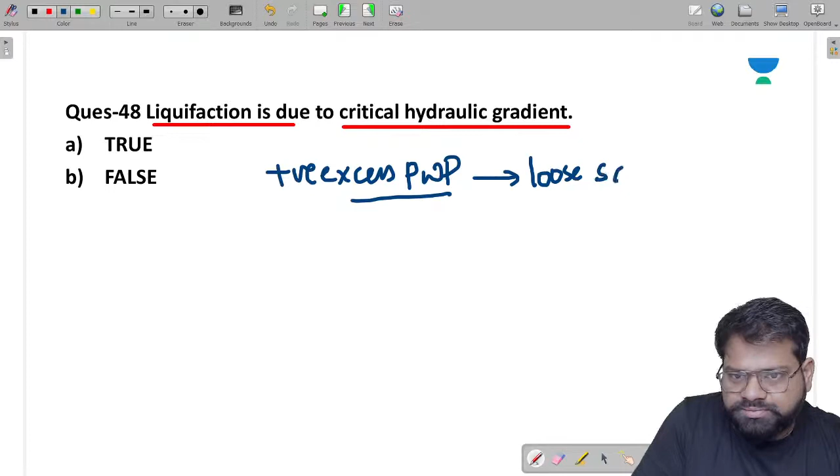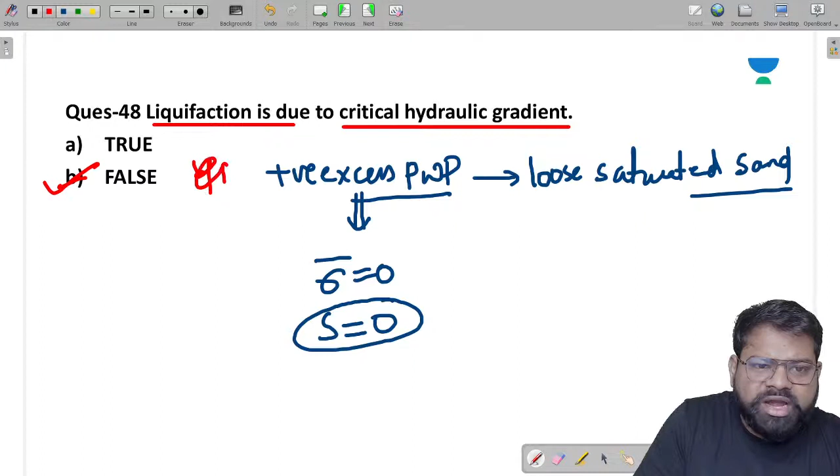Liquefaction is due to critical hydraulic gradient - no, liquefaction is not due to critical hydraulic gradient. Liquefaction is basically due to the positive pore water pressure developed in loose saturated soils, sands. In case of loose saturated sands, due to generation of high positive pore water pressure, the effective stress becomes zero, due to which the soil loses all of its shear strength and starts flowing like water. This phenomenon is called liquefaction. So the right answer of question number 48 would be B.

Moving forward to question number 49. Tell me the answer. The active earth pressure obtained from the Rankine theory is greater than the Coulomb theory. Tell me whether this statement is true or false.

Yes, this statement is absolutely true. The active earth pressure obtained from the Rankine theory is greater than the active earth pressure obtained from the Coulomb theory. That is because Rankine neglected the friction. This is the only reason, and this is why the Rankine theory, being simple, will give higher active earth pressure as compared to Coulomb theory.

Since retaining walls are designed for active state, this is the only reason that in India retaining walls are designed by Rankine theory - just because Rankine theory gives conservative results, so the safe design will happen by Rankine theory. So this statement is true. The answer of question number 49 would be true.

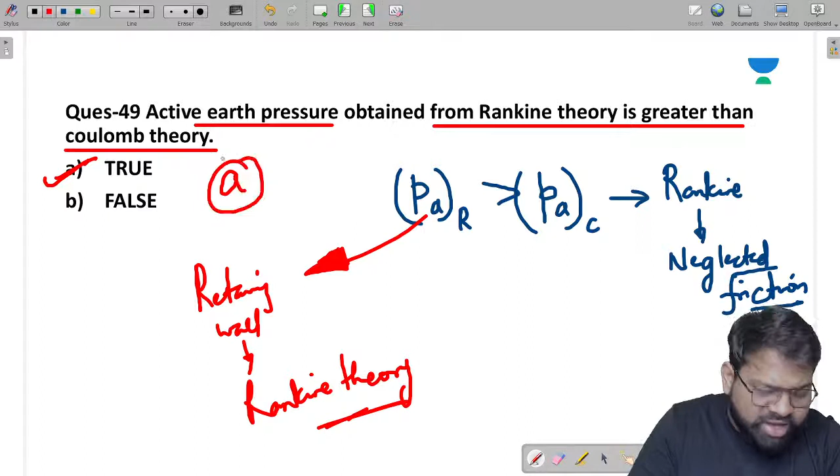This is the last question of today's class. Tell me the answer.